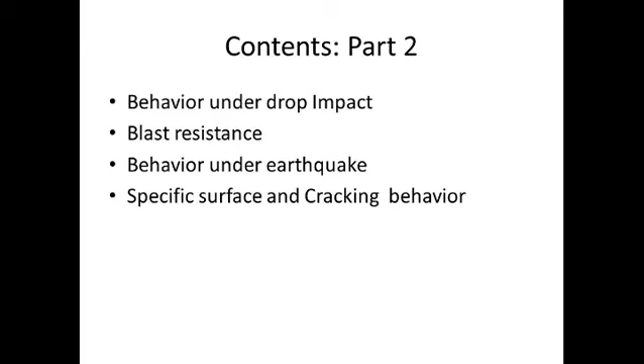I hope my presentation is visible to you. I'm presenting here the work done by my colleagues and my students over the last few years. We initially started with the testing of ferrocement for water tanks and some other components, and thereon we explored different ways of testing it and how we can improve the properties of ferrocement. So this is how the journey of ferrocement was for us as a material which is to be established.

The entire efforts were towards attaining better properties of ferrocement and altering the methods of testing. In my presentation, you will find the conventional testing we had done in the earlier phase, and later on as we changed our testing methods, those methods I would like to present here too. As we explored the ways of testing it, we felt confident that ferrocement shows better properties if we treat that material with a different treatment. So this is how we found out.

It's almost a group of ferrocement researchers who are working on this. To name a few: Dr. Darshan Gaidankar, Dr. Amrut Joshi, Dr. Purandare, Dr. Pimplikar, Professor Minde, and Suman Shinde. They constitute the ferrocement group researching on this material and its various aspects.

Because of the paucity of time, I am splitting this presentation into two parts. Today, I am speaking only about the fundamental properties of ferrocement, where we are not exactly treating ferrocement as RCC.

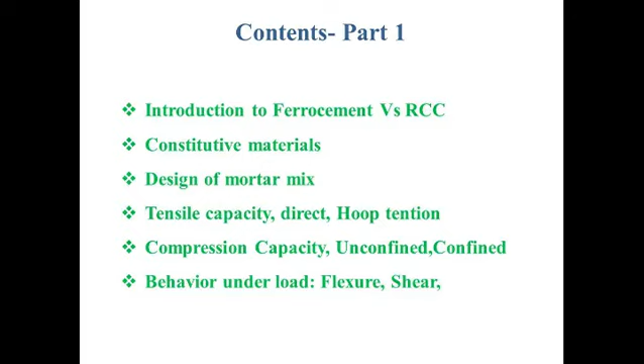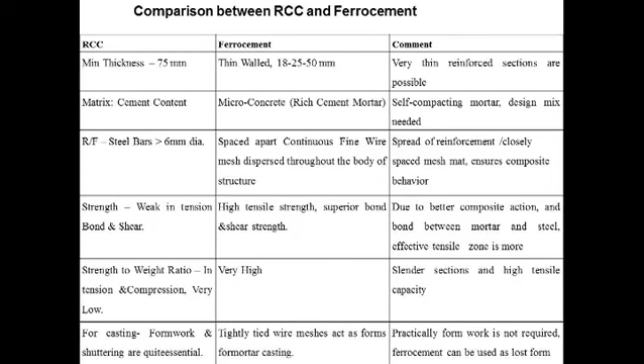We are looking at what are the requirements for constitutive materials, design of mortar mix, tensile capacity in direct tension as well as hoop tension, compression capacity in confined and unconfined concrete, and behavior under load for flexure, shear, etc. Here I am stopping up to shear because bond, etc. I will cover in the second part because of the paucity of time.

So the motivation was: when we thought about ferrocement, what are the permissible stresses that we should consider when we take up any design problem? We were not able to get any correct solution or comment from ACI or any other books, say Naaman's book or Balaguru sir's book. So we tried to find it out by way of experimentation and simulation, what can be the permissible stresses, what can be the ultimate stresses at different loading patterns for ferrocement. This was actually the motivation, and we tried to utilize ferrocement as a structural unit, understanding its various load carrying capacities for different loading conditions, and in what way we can utilize these material properties of ferrocement.

That was the motivation. In the very beginning, we felt that it is definitely behaving in a different way than RCC, because by definition itself, ferrocement is a thin-walled member, maybe 18 to 50 maximum, that is the thickness. And it has to be made using rich cement mortar. So that mortar and its mix design is also a very important part, which plays an important role in imparting the material properties to the ferrocement.

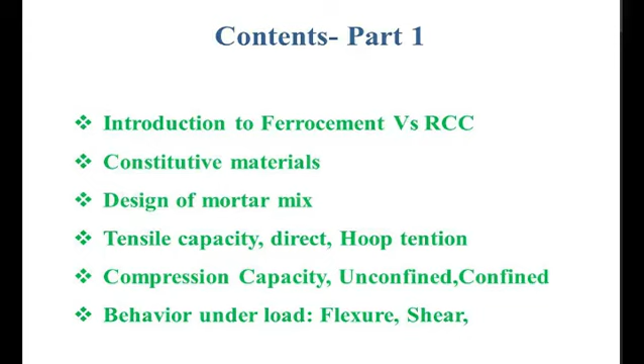So that part is again still there, which needs to be explored if we use high strength reinforcement wires, weld meshes. That will definitely improve the entire property of ferrocement. This is what we felt, that's why it's behaving in a different way than RCC.

Once we establish the properties for the ferrocement, why can't we use it as a structural element? That was the question, and we started chasing this philosophy of using ferrocement because it was exhibiting very good strength in tension as well as flexure, and also in blast and impact. So that's why we are underutilizing the strength of ferrocement.

That was the question, and we tried to establish the material properties so that at least we can comment on the strength of ferrocement for various loading conditions, and then know whether we can use it as structural members. So that was the question.

Hollow columns also we can construct out of ferrocement. And just like we arrange a jigsaw puzzle, we can use these components at the site and erect the structure within some limits of vertical dimension.

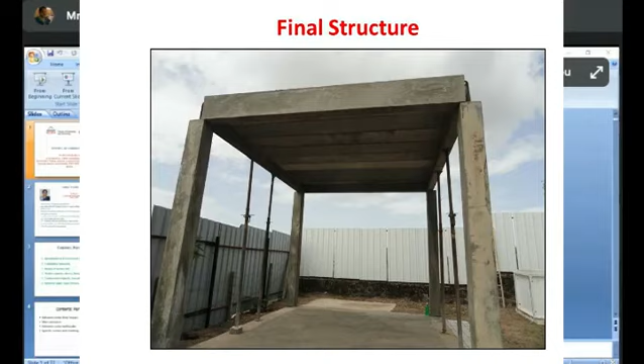This is just a typical example where we can use structural components made out of ferrocement, and we can erect the structure. There is a limitation because the ACI does not accept the design values or the ultimate tensile values, ultimate stresses. So that was the motivation, and we tried to use this cement's capacities for ferrocement being used as a structural component.

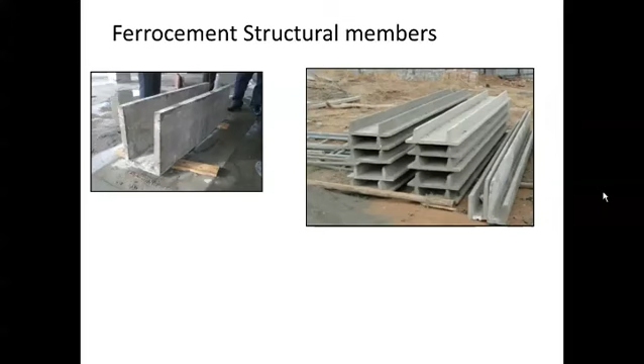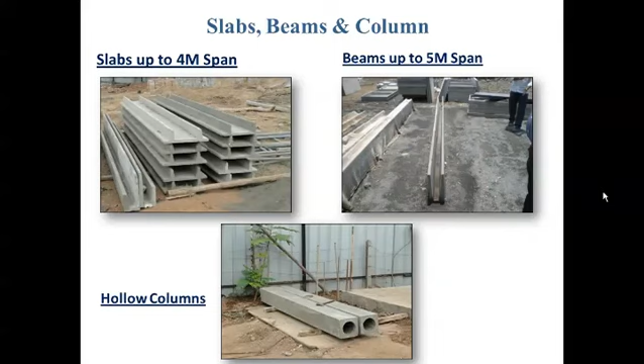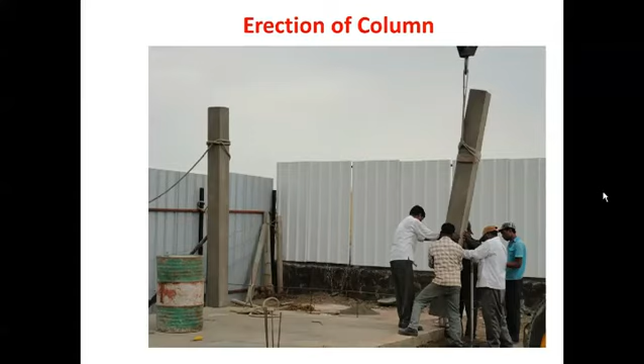The intention started because of this small structure which is seen in the photographs. Here you will see that we are erecting these members, columns, beams, slabs, all made up of ferrocement. These columns are hollow columns, and we can really erect the structure with a small hydra. So there is no much heavy type of equipment required for carrying out the installation of these projects. That was also one of the advantages.

Almost in a few days, you can complete all types of structures like this using ferrocement components. So that became a motivation. But what was required for arriving at this stage was, what are the capacities of ferrocement as a structural member? So that was the point we chased.

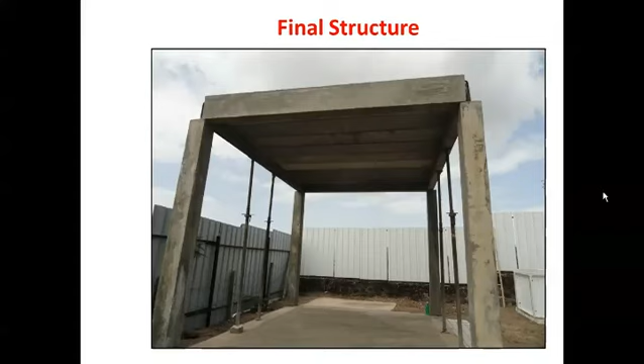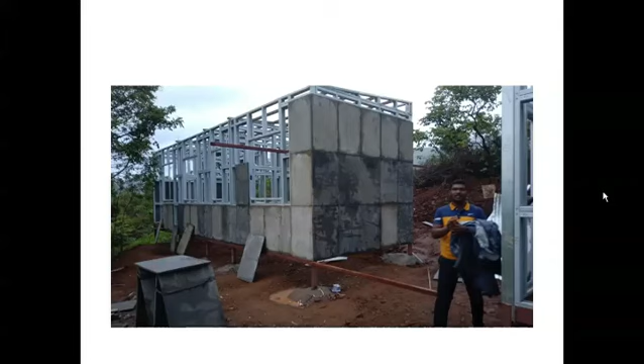You will see here in two ways: complete ferrocement structure and LGS plus ferrocement panel units. This is another type of structure where the loading pattern will be different. So both are possible using ferrocement.

Basically, we will start with the constituent materials, and since we all know that mix design of the mortar will have a major impact on the strength of the ferrocement, mix design was important.

River sand is almost not allowed to be used, that's why we tried with crushed sand. And to reduce the portion of cement, we have also used fly ash, so that we achieve overall economy while actually using the ferrocement materials.

So it was advised to carry out the mix design of the mortar, which will require the workability suitable as self-compacting mortar. That's how workability needs to be maintained. All the efforts which give us that kind of self-compacting workability were required so that we can completely fill the mold with no voids and get a good finish for the mold.

If high strength mortar is used, it was possible to raise the tensile load carrying capacity of the ferrocement in axial tension as well as in flexure, because the compressive strength of mortar itself is higher. Along with that, if we can combine the steel also as a high strength steel, then together that composite can also increase the capacity of ferrocement. So high strength mortar and high strength steel.

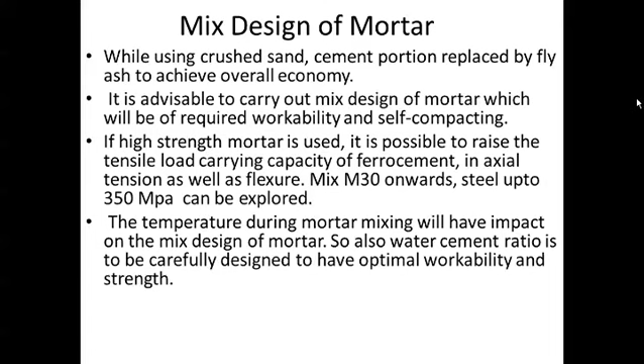Water cement ratio that was optimal for the free flowing, self compacting type of concrete or mortar came to be 0.38 to 0.45. Along with that, you can also combine various chemicals required for improving the workability, depending upon the impact of that chemical. So that also needs to be taken into consideration while doing the mixed design.

And when the cement was replaced by some portion of fly ash, it indicates that up to 35% of cement can be replaced by fly ash without affecting the compressive strength. So that much of economy can be achieved if we replace some portion of cement by fly ash.

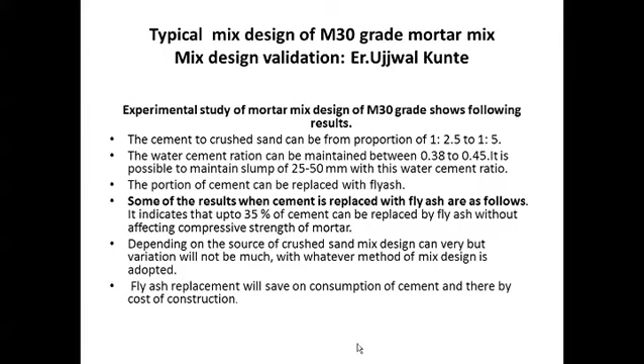Also, we were able to control the temperature at the time of mixing. Depending upon the source of the crushed sand, mix design can vary, and every time you are mixing the mortar, the mix design has to be different because the sources of the constituent materials will have that impact. So fly ash replacement will save the consumption of cement and thereby have a good impact on the overall cost of construction. So that was the impact about the water cement ratio, fly ash replacement, and workability in totality.

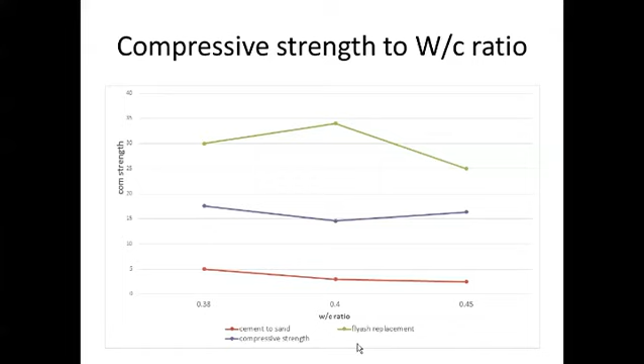So this was the graphical representation. You will see that water cement ratio 0.38 to 0.45, somewhere in between that range, you can always position the water cement ratio so as to have maximum properties for the ferrocement. Next slide please.

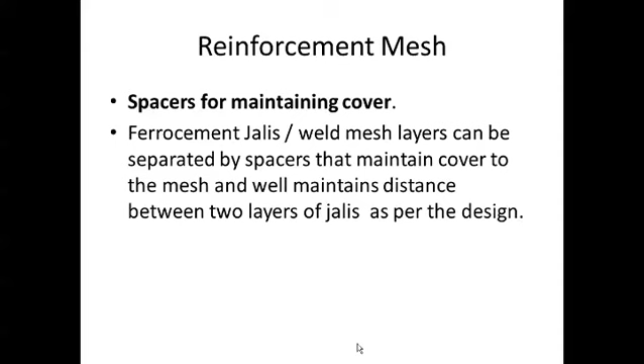Now when we actually cast the ferrocement, mesh comes the next constituent material. When we are keeping one mesh over the other, they have to be separated by spacers so that our cover for those meshes is maintained, as well as the distance between the two consecutive meshes. So specific spacers are to be designed and fixed between the two layers of the jali. So the special spacers were designed and used to maintain the dimensional accuracy of the jali.

Now, when we compare ferrocement as a casting and ferrocement as a hand plastered component, meaning when it is used as hand plastering or mortaring, the two different entities are: if ferrocement is to be designed as a structural element, then physical as well as material qualities have to be consistent and reliable in that entire cast element.

So somewhere there has to be a need of standardization. Now, what is that need of standardization? All the time we must get whatever desired strength is there. So that's why at every level, from constituent to mixing to the casting, there should be a standardized process that will ensure our design parameters for that ferrocement component.

So the first requirement was total encapsulation of the steel meshes as well as full consolidation of the thin section of the member, so that jali and mortar completely behave as a composite material without having any voids or separation of jali and mortar. So total encapsulation must be ensured, and that can be possible only by strict quality control of the casting.

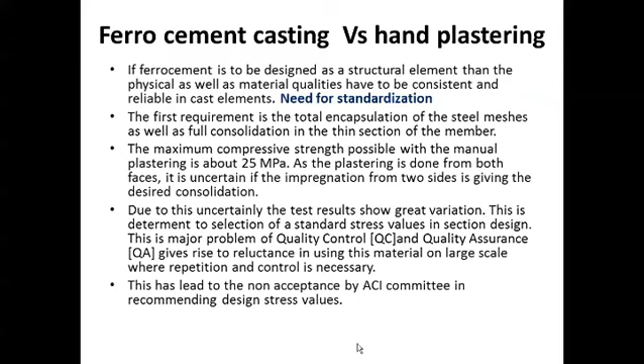Now, when we started with ferrocement casting with strict quality control, execution of high quality casting of the ferrocement, it is necessary to observe several material and construction parameters.

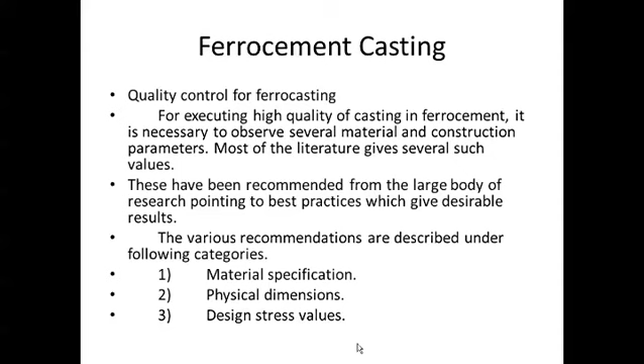Many of the literatures give all these values. Many authors have already done that work and given their comments. These have been recommended from a large body of research pointing out the best practices all over the world. But still, various recommendations are prescribed under the following categories: material specification and its standardization, physical dimensioning and its standardization, design values, and accuracy of those design values, because we have standardized practice for material specification and physical dimensioning. So this was the need of the hour, and that's what we tried to do in our experimentation.

So in the material specification, as I already said, it was a mortar mix. Sand has to be of a grading which does not have too many fines in its particle size proportion. The best results we obtained were from grade 2 distribution of the fines, which gave us better proportioning for the mortar mix.

Large portion of particle fines need more water to obtain the required viscosity, so this has to be borne in mind while using a large portion of fines. Sieve analysis has to be monitored, and its impact must be considered while doing the mix of the mortar.

In order to get M35 as the final compressive strength, because minimum we start with M30, M35 for ferrocement, the preferred proportion of cement to sand ratio is somewhere between 1:2.75 to 1:3. This proportioning, with sand of grade 2, gives a good surface finish.

To get the right viscosity, 0.35 to 0.45 water to cement ratio is used, and a more fluid mix can be made with suitable use of additives, many of which are available in the market with different properties. Some enhance properties, some are retarders, but sometimes they can give additional strength characteristics useful for early demolding of the ferrocement mold. So instructions regarding the use of such chemicals should be properly followed, as we felt whenever we used these chemicals for casting ferrocement components.

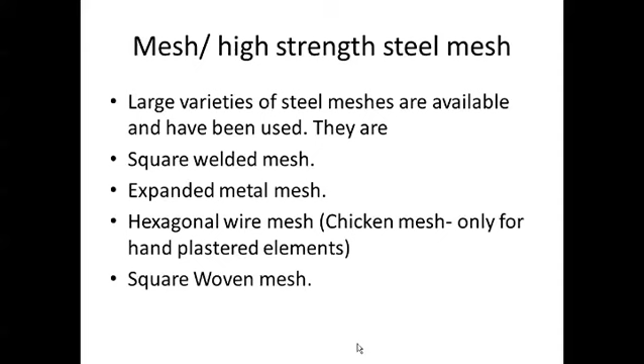Suitability of square welded mesh versus expanded metal mesh: I think all of you have been working on this for pretty long years, and you know which mesh is suitable for what kind of ferrocement structure. For a precast structural element of ferrocement, weld mesh is very useful, while expanded metal mesh is not really suitable and not recommended, because it will not contribute to the load transfer mechanism as the load is being applied.

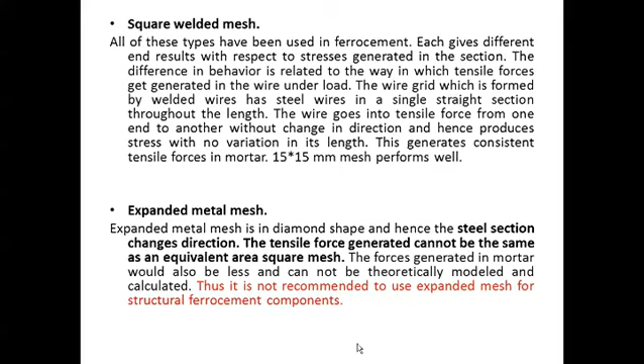Hexagonal wire mesh or chicken mesh: in the case of woven mesh, it is even worse, because the wire diameter is about 0.5 millimeter, and when tension is applied to the wire, it has a tendency to open up at every location where the woven cross wires intersect with each other. So this is how it will not really contribute to taking the tension, which is why chicken mesh can only be useful for arresting the crack mechanism.

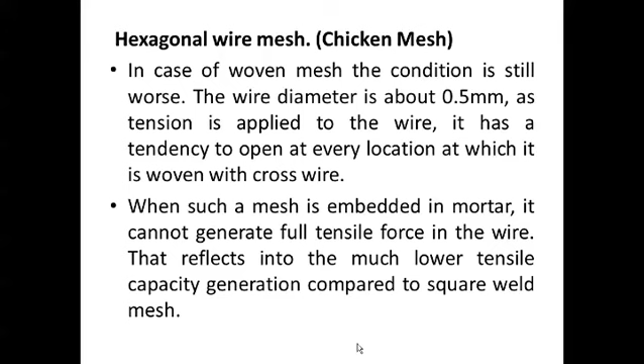So only for that purpose chicken mesh can be used. When such mesh is embedded in the mortar, it cannot generate full tensile force in the wire. In other words, we can say chicken mesh will not contribute to the tensile strength of the ferrocement. This reflects into lesser tensile strength capacity generation as compared to square weld mesh, while in square weld mesh, all the wires in one direction will contribute to the tension capacity in that direction for the ferrocement component.

Now, the thickness of the cast sections being very small, two or more mesh layers are placed. Due to the structural requirements, it is necessary to keep them in correct position in cross section. In order to achieve this positional accuracy, it is necessary to have cages of skeletal steel of suitable diameter. It also helps in ensuring the mortar impregnation of the entire wire mesh without leaving any void.

The cross-sectional area of the skeletal steel enhances the shear capacity as well, because of the close spacing and the interaction between the two consecutive jalis or meshes which are placed together.

So percentage of steel in the cross section, designated in terms of volume fraction, plays not much role in generation of tensile strength in the mortar, that was observed during the experimentation. Though ACI code recommends 1.8 to 2% of the reinforcement to be used, it is observed that minimum volume fraction should not be less than 1.5% to obtain good results.

So in case of areas where the compressive stresses are predominant, the percentage can be even lesser than 1.5, because anyway steel will not be, mortar will be contributing into the compression resistance. So only if the component is resisting compression, there we can reduce the volume fraction of this reinforcement to less than 1.5%.

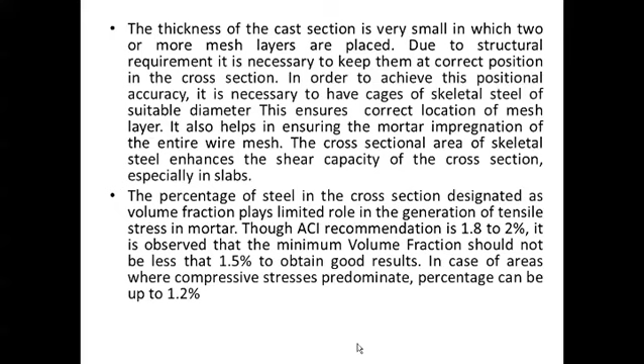Next, please. Now here we started thinking about the philosophy, what exactly happens when we are sandwiching the jali between the mortar, which is of high strength. So when the wire is encompassed with the high strength mortar in one direction or in two directions as shown in this figure...

Our philosophy is that the area which is very adjacent to the reinforcement actually participates into the tension carrying capacity. And how much is that area that contributes into tension carrying capacity? It is almost equal to 5 millimeters for a jali diameter of 1.4 mm diameter.

So we call this entire circular zone, which is surrounding the reinforcement, the zone of influence or radius of influence, because that zone is participating in imparting the tensile capacity to the component.

So based on this philosophy, we worked out the further testing, and also we simulated it using the finite element analysis, and there also we can verify and validate that yes, there is some zone which is adjacent to the jali which contributes into the tensile load carrying capacity.

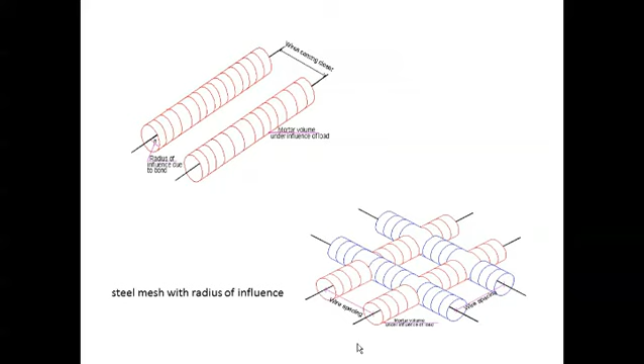Though we say that mortar takes compression and steel takes tension, some part of mortar is also useful in taking the tensile force. Now, because this jali is very closely spaced, 15 mm by 15 mm or 20 mm by 20 mm, we can really bring this zone of influence together with each other, so that the entire plate, entire plank, can be very solid and contribute completely into the tension.

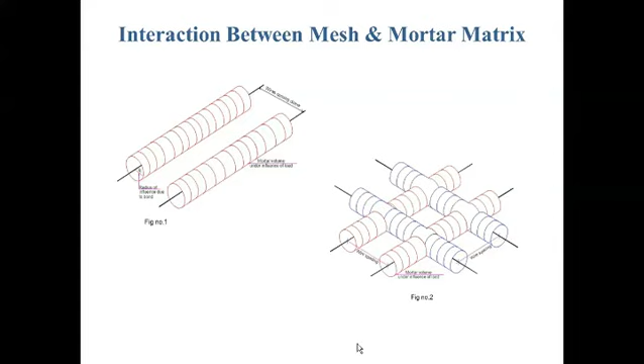So that was the entire philosophy. 5 millimeters from this side, 5 millimeters from the other side, so that becomes 10 millimeters. If we bring the center to center distance of jali together, it will be more strong. This is what we observed during our experimentation.

Next, please. The way we stack these jalis, either we can stagger it or we can keep it exactly one over the other. So what happens when we keep it exactly over the other?

So based upon our philosophy that there is a radius of influence, when we keep one jali exactly over the other, there will be some voids here which will not really be contributing into that tension carrying capacity or compression carrying capacity.

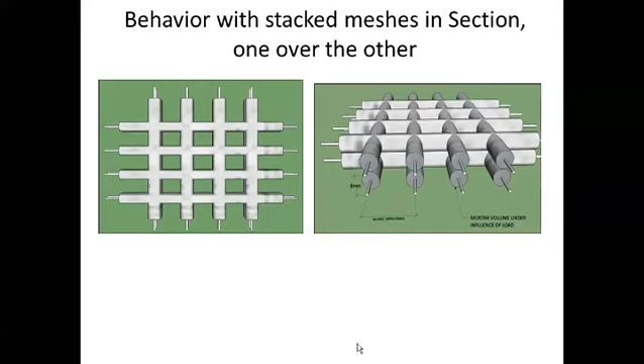So what we can do is stagger it, and in that case, if we stagger the jalis, we can overlap these influence areas, so that entirely we can bring the cross section into the load carrying zone. That will be depicted in the next slide.

So here you will see, if you stagger the jalis, you can stagger this zone of influence also. This becomes a close knit area, cross section, where the entire composite of steel and mortar will be useful in taking that load. Whether this philosophy works or not, this is what we tried in our testing, and what we got, we will see in the next thing.

The next part again is physical dimensioning. Earlier, we covered the constituent materials, their quality, and how we should maintain the quality for the constituent materials we have seen. Now let's move to physical dimensioning.

One of the first issues is the diameter of wire in the mesh. ACI code recommends almost 0.5 millimeter to 1.5 millimeter diameter. It is not possible to handle and place wire with diameter less than 1 millimeter. The mesh tends not to hold its shape and is very difficult to keep in correct position. It also bulges during concreting because it is very light in weight.

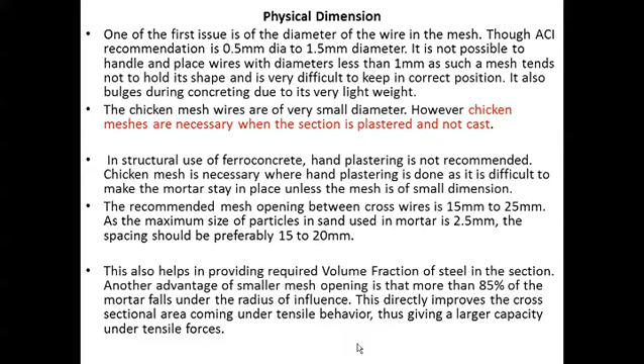This was observed in the experiments that we conducted, which were typical experiments performed through tensile test and flexural test.

Experiments have been done placing the meshes staggered, so the cover is left out of the area of tensile influence. This increases the participation of the entire section into the load carrying mechanism. This is how we can place or stagger the meshes depending on the desired composition of the section, while maintaining the volume fraction of reinforcement to be provided. These things can be designed, the working can be done, and then only the casting can proceed.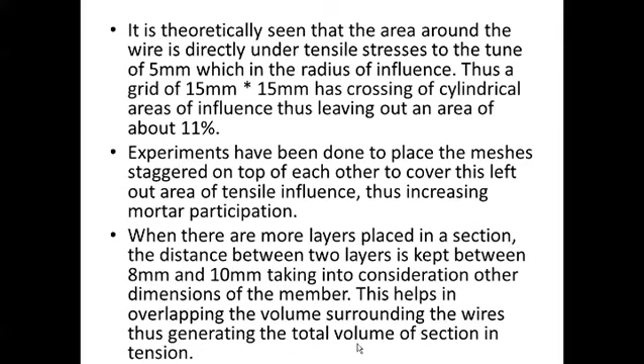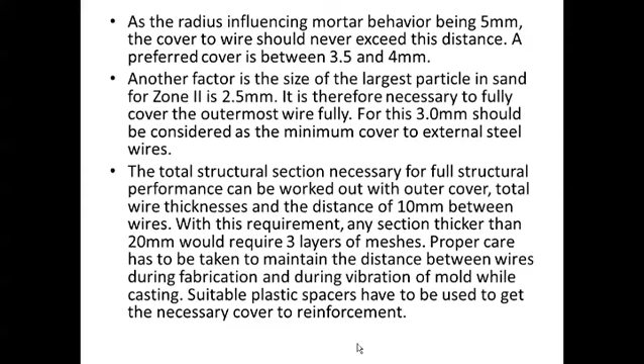Next, please. I will skip this because these layers I will show on the diagrams itself. Let's go to the next one.

Design stress value was the third parameter. As mentioned before, ACI does not recommend any stress values in tension, bending or shear. Due to quality control issues of handmade products, some authors recommend only casting of elements to get quality control and predictable stress values in cast elements. The major departure from the construction method adopted since the inception of ferrocement, almost 50 years back, it has to be appreciated that no structure can now be designed without predictable product quality and its allowable stress values.

Experimental work to determine tension values was done traditionally with mortar prisms with steel wires tested in axial tension. The value was taken as the possible tensile stress in the ferrocement, and a factor of safety of up to 3, 4, or 5 was considered in the design process.

From experiments carried out by various authors, a similar value was observed for axial tension, about 14 MPa, using steel with 250 MPa yield stress, giving a ferrocement stress value of 14 MPa. But the same steel generated almost 24 MPa tensile stress at first crack in hoop tension or in bending. So we can raise the bar from 14 MPa to 24 MPa by adopting methods to control various processes. This increase from 14 to 24, or say 25, is a pretty good improvement in the property.

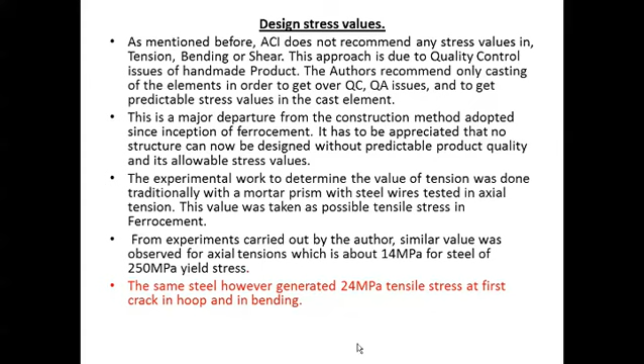What the authors suggest, say Antoine Naaman, is that the tensile stress is almost half the stress observed in bending condition. This works out to a value for axial tension of about 12 MPa, because we are considering ultimate tensile strength as 24 MPa as given by Antoine Naaman. So the tensile stress to be taken for design purposes is half of it.

Shear stress, what he suggests, is 1/3 of the stress obtained in bending. So that works out to be just 8 MPa. These are the values offered and available in the text from various sources, conducted by Balaguru, Shah, as well as Antoine Naaman. They would be a safe average for tests by many other researchers who have given it.

It is also reported that higher values of bending tension can be observed, reaching up to almost 30 to 35 MPa, when we use high tensile steel wires and mortar of 30 MPa plus capacity. So we are reaching from the elementary values available in the books, from 24 to 35.

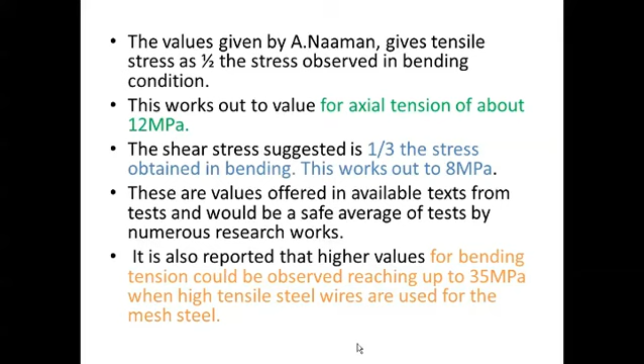What exactly happens when we test it for various loading conditions, say if it is in pure tension? Earlier, in our first phase, we tested some tension samples with dumbbell shaped specimens, but then we changed our pattern. So what exactly happens? We tried to find out the philosophy behind it. If this is the jali which is embedded into the matrix and direct tensile force is applied, only the steel which is in the direction of loading plays a role in taking the tensile load. The jali or reinforcement in the transverse direction does not contribute to this tensile capacity for the ferrocement.

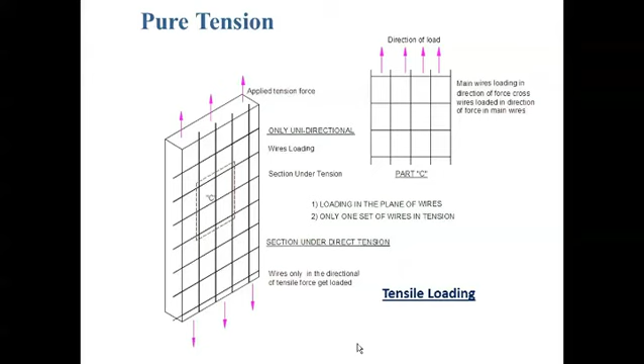The typical load elongation curve given by ferrocement, we all know, exhibits strength up to 25. But experimentally we can go even beyond that. This is what is emphasized here. After conducting many experiments, 25 will be, we can say, the minimum value of strength which we can observe. We can still go ahead of 25 Newton per mm square.

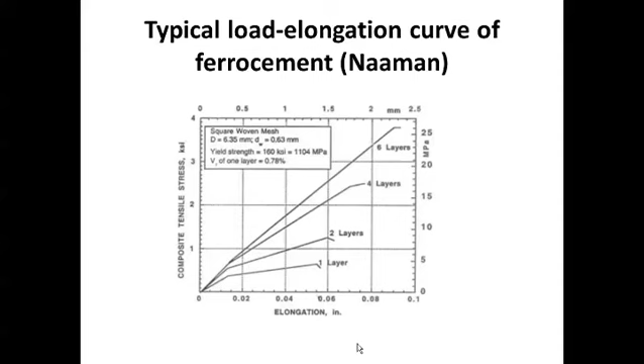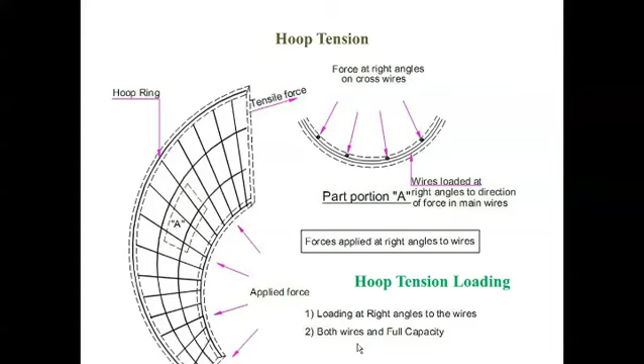Now, direct tension was only one way of testing tension. There is also hoop tension, because ferrocement is many times used for water tanks also. So in what way can we say that by virtue of the shape of the curvature, it imparts that strength? This is also seen in curved forms of ferrocement, and we can test it in hoop tension as well. When we test in hoop tension, all the jali, transverse as well as longitudinal, come into picture and exhibit tension, with the tensile zone equally distributed in both directions of the jali. So this is a more useful way of loading and utilizing the capacity of ferrocement to its fullest extent.

We could see that behavior in hoop tension. What we did was cast PCC cylinders which were encased with a ferrocement jacket, and then tested them for hoop tension. Compression was applied to the cylinder, and we found that the capacity of the PCC cast in the form of a cylinder was enhanced multi-fold, because it was confined compression for the concrete. The force generated in the ferrocement was hoop tension, and we got a lot of hoop tensile capacity when tested in hoop tension, more than 24 Newton per mm square. With M30 grade mortar used for the jacketing, it reached almost up to 32 Newton per mm square when tested in hoop tension.

So there is a question here for me as an academician. Just like we use the limit state method and utilize some portion of steel in the non-linear zone also, when we load ferrocement in its hoop tension way, maybe we will be able to load it in its non-linear zone as well and get that enhanced strength of the ferrocement. So that is possible if we load it in hoop tension.

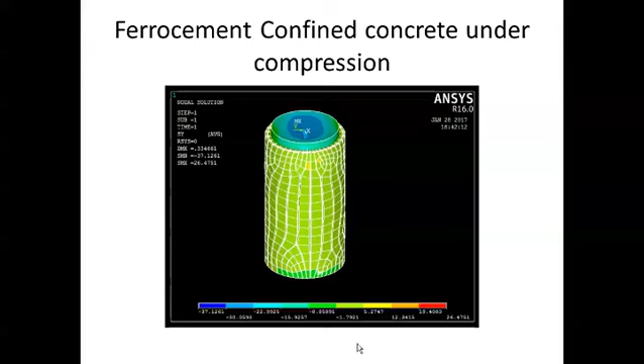And this is optimal utilization of the capacity of the ferrocement.

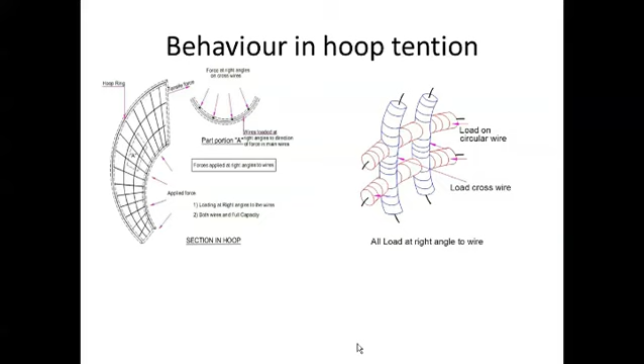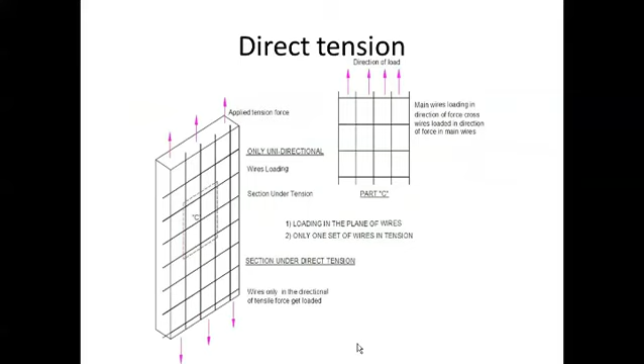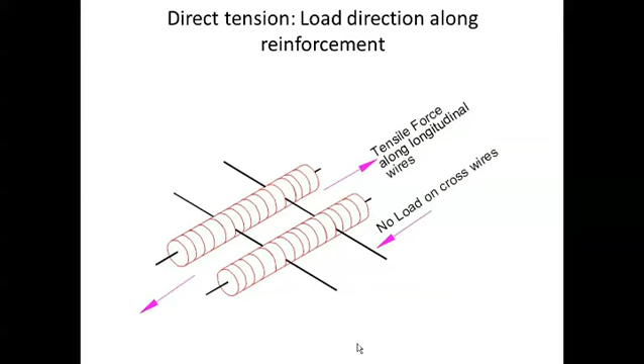So when we load it in direct tension, only these two zones are participating in the tension, while when we load it in hoop tension, we get the entire surface of the ferrocement participating in hoop tension.

Now, how to test it instead of a dumbbell shaped specimen? How to test the plate in tension? So we made two slabs like this, pasted them, and arranged the setup as shown in this figure. We bolted it with two steel plates and gripped it into the two crossheads of the universal testing machine. These two plates were glued together, with one plate having a higher thickness than the other, so that the plate with the smaller thickness would undergo complete tension. This is how we tested this plate for direct tension.

We found that after 28 days of curing, we got a tensile strength of 16 MPa. There was no failure at the joints or at the crossheads; it was complete tension failure, which was ensured by utilizing this test setup.

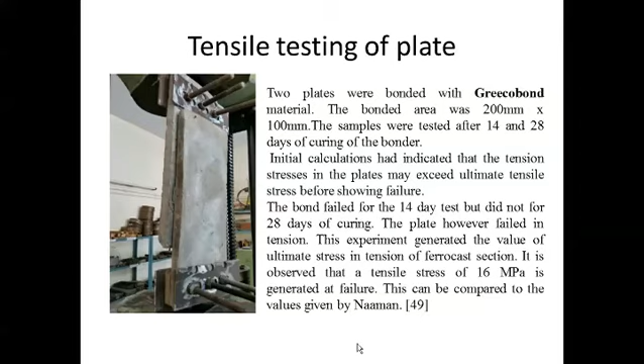This was conforming to the tests done by Naaman, and we could get similar kinds of results when the plate was tested directly.

Now the direct compression test of ferrocement. The challenge was that if we load the specimen in direct compression under the two crossheads, there was a possibility it would get crushed near the crossheads. So we increased the cross section of the specimen at the two crossheads so that it would not fail there, at the bottom or at the top.

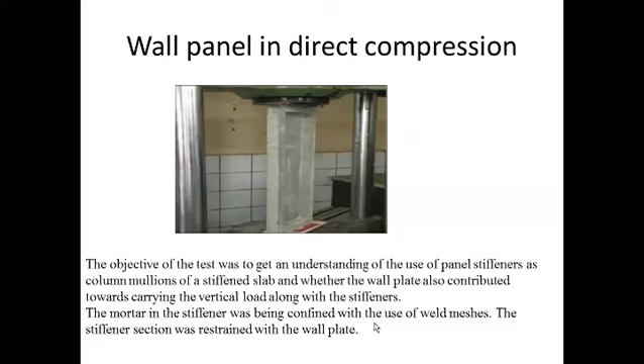A zone of failure was induced in the middle. You can see the thickness of the middle portion is the actual thickness of 20 millimeters of ferrocement, while the edges were made thicker than the central portion, so the zone of failure was introduced in the central portion. This is how direct compression was tested, and we tested the wall panel unit in direct compression, since it may be used as a compression element.

We got the direct compression capacity as almost 367 kilonewtons. Applying theory to the loading condition and end constraints on this column, Euler's load comes out to almost 200 kilonewtons if both ends are hinged, and almost 300 kilonewtons if both ends are fixed. But the actual test load we got was 372 kilonewtons.

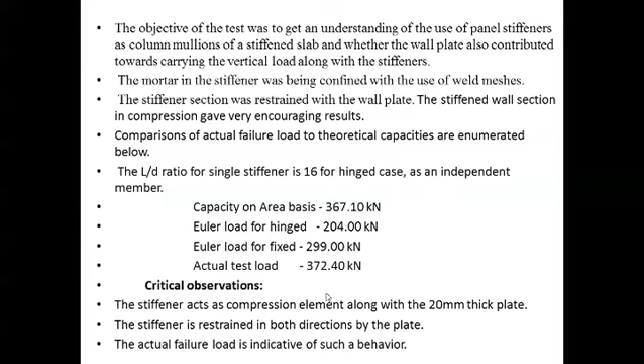What was the observation here? The L by D ratio for a single stiffener is 16 for this particular specimen. For this L by D ratio of 16, with an actual compression testing load of 372 kilonewtons, the observation was that the stiffener acts as a compression element along with the 20 mm thickness plate of the ferrocement. The stiffener is restrained in both directions of the plate, X and Y, both providing restraint against buckling of the panel. So it is not exactly a single column under direct compression, but rather a two-way compression, two-way buckling action. The actual failure load is indicative of this kind of behavior when the plates are used as compression elements. This was the observation when we tested the ferrocement plates under compression.

In case of bending, we tested the units under 4-point loading or 2-point loading, pure bending we can say. When we tested the 2-point loading slabs, various thicknesses and various percentages of steel provided by number of jalis were tested.

We have ensured that, just like a beam, there is a neutral axis, with a compression zone above it and a tension zone below it. We placed the reinforcement jali, one in the compression zone and one in the tension zone, with no jali at the neutral axis.

This is how the specimens were cast, and we tested them in bending. This was the test setup, and you can see the flexural cracks originating from the tension zone. The setup is for pure bending, without introducing a shear zone.

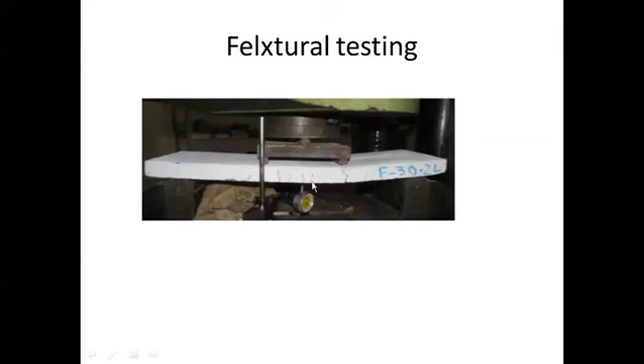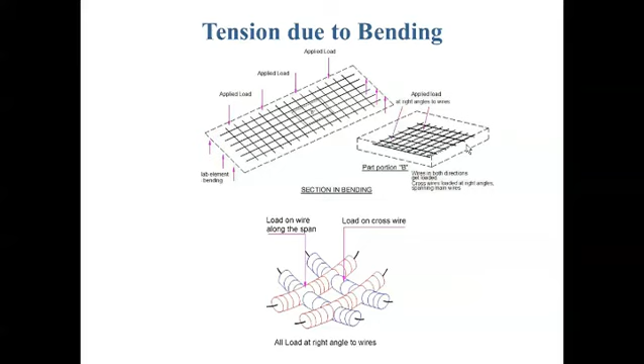When we subject it to flexure, it behaves almost like a two-way slab, with reinforcement contributing to the flexure in both directions in the plane of the ferrocement plate.

That can also be simulated, and we can get actual stresses within the jali as well as in the surrounding mortar, in both tension and compression zones. We could test it and get values for the stresses and deformations in the mortar.

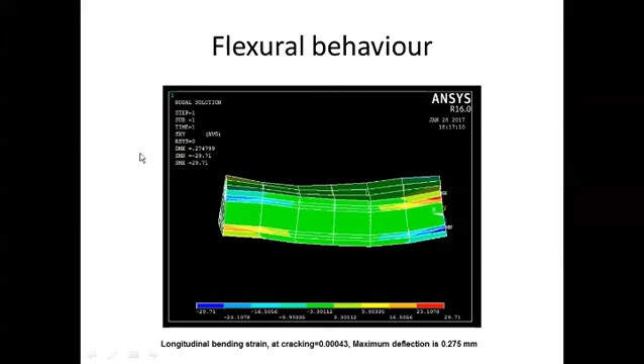If you can read the value here, the mortar strength was 29 Newton per mm square. So the analytical and experimental values match pretty well together, supporting our comment that we can enhance the properties of ferrocement through analytical study as well.

This shows the deflection pattern and zone, and what happens exactly at the jali. The stresses induced are depicted by different color codings, each representing a specific stress value at that point. We observed the stress at first crack was almost 28 Newton per mm square in the mortar.

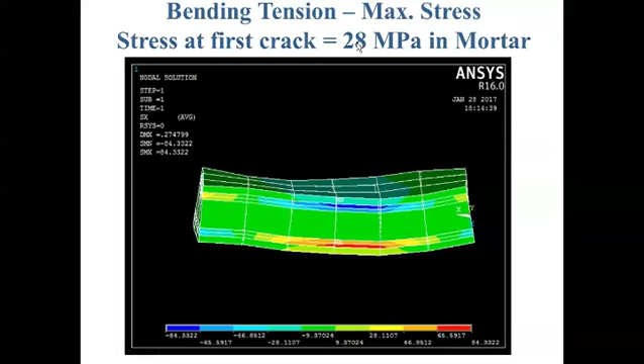As we increase the loading, the crack propagates towards the neutral axis, and we could obtain an ultimate value of load carrying capacity as well.

After testing the slabs, we also tested the actual members used as flexural members. One flexural member cast was a full-scale beam with this channel cross section, 3 meters long.

The complete 3-meter full-scale beam was tested under 4-point loading, and we could reach a flexural tensile strength of almost 25 Newton per mm square in actual full-scale testing of the beam.

This is the assured value of flexural stress. We plotted load versus deflection for this beam and saw elastic behavior up to a certain limit, then toughness beyond that, indicating a non-linear zone. Still, we reached an ultimate flexural tensile strength of 29 Newton per mm square for this beam.

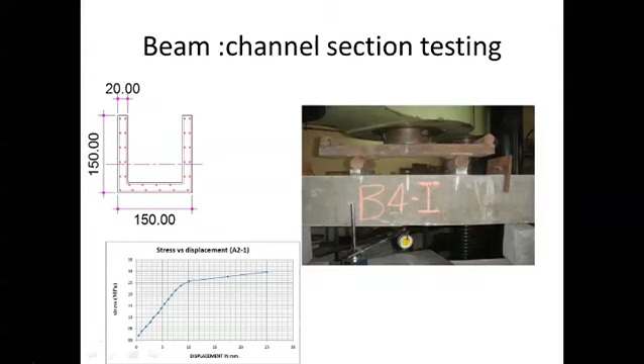This is a typical setup for ferrocement with 3 jalis. This test had one more jali at the neutral axis. We observed that results for 2 jalis without any jali at the neutral axis behaved exactly the same as the sample with a jali at the neutral axis.

This indicates that if reinforcement is placed at the midsection, it does not really contribute to flexural strength. So reinforcement must be away from the neutral axis. This is our remark from testing two different kinds of specimens, with jali not at the neutral axis and jali at the neutral axis.

You will see there is consistent deflection when we test it in flexure, and how to incorporate this deflection for serviceability still remains to be explored. Only then will we be able to comment on the serviceability criteria, which is a function of the deflection of the ferrocement component.

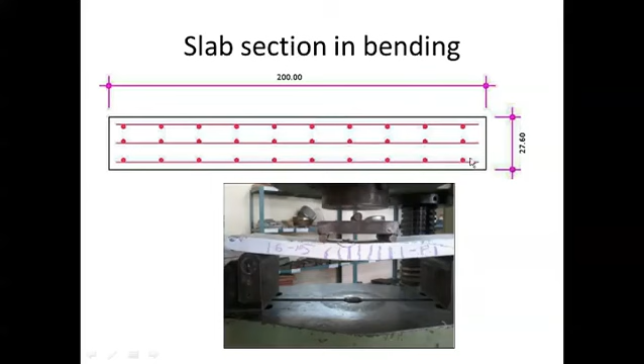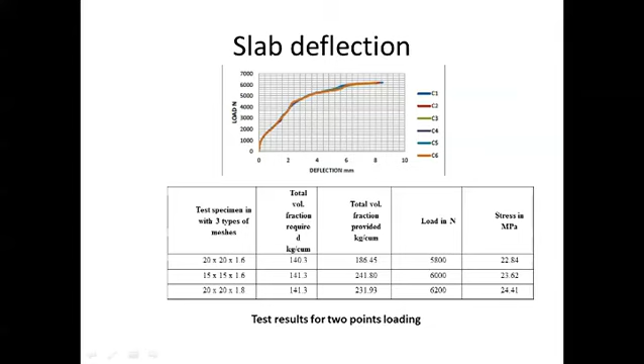In the earlier slide, you saw different sizes of jalis used: 20 by 20, 15 by 15, and 20 by 20 with 1.8 mm diameter. You can see the stress values here. When the steel wire diameter was 1.8 mm, it gave almost 24 MPa compared to when we reduced the diameter to 1.6. So the diameter of steel does play some role, but 1.8 definitely gives better results than 1.6 diameter jali reinforcement.

Just out of curiosity, we did some analysis and actual testing. We cast one plate and tested it with a loading of 500 kg, as if a car was standing on this plate, and we could simulate it using finite element analysis as well. So what happens to the fiber ferrocement plate if a 500 kg car is kept on this plate?

We simulated it and got the load distribution pattern. Deflection was almost 3 millimeters at the center midspan, and the stresses are also within limits for this plate. The fun part, why we did this, was just a hypothetical experiment to find out whether this entire plate goes into sharing that load of 500 kg or not.

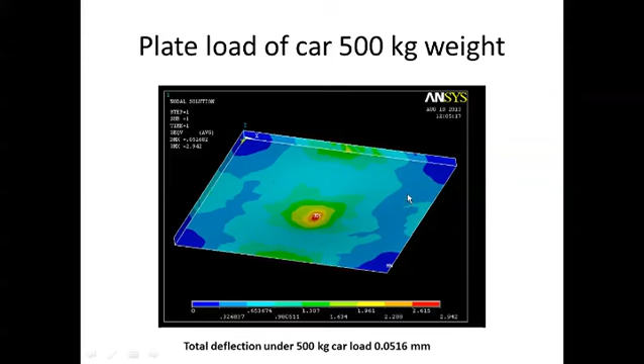So that is depicted by finite element analysis. This is the portion shown in sky blue color, which is actually contributing. The zone is quite big, almost 80% of the plate is contributing to sustaining the applied load. That was the takeaway from this hypothetical study that we had done.

In compression, we also tested confined core compression, on circular and square cross sections with weld mesh confinement. We took a circular column with ferrocement ferrocast tube, a circular column confined with 2 layers of weld mesh without tube and no PCC inside, and a square section with ferrocast tube confinement. Now I will show you what results were obtained.

When circular confinement was done for plain concrete, this is type 1. In different cases we got enhanced strength with 2, 3, and 4 layers of reinforcement used as confinement. The compressive stress we got was almost 40 MPa with 2 layers, 60 MPa with 3 layers, and almost 64 MPa with 4 layers.

As you go on using this confinement, we can derive the advantage of confining the plain concrete with the help of ferrocement. Load carrying capacity was enhanced from almost 30% to 110%, just because of the jacketing. So jacketing is also one of the important uses of ferrocement, which can give really good advantage if utilized properly.

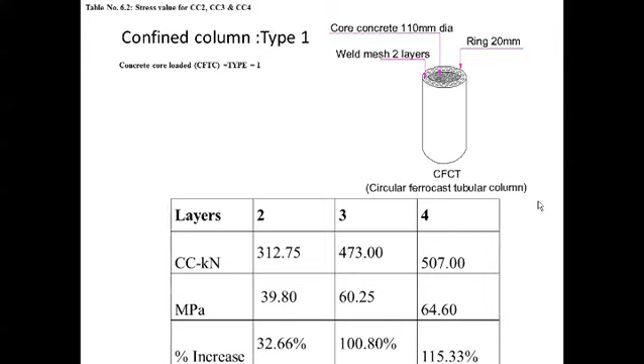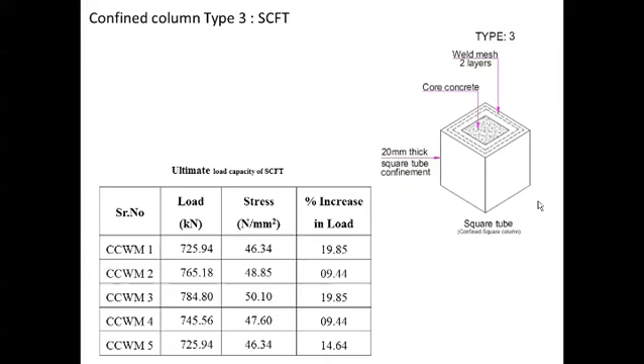Again, we come back to the previous philosophy: because of hoop tension, the steel going into hoop tension imparts more load carrying capacity. While in square jacketing, it does not really go into hoop tension, which is why it does not increase the load carrying capacity as much. Only hoop tension gives you enhanced load carrying capacity in compression. That was the takeaway from testing under confined compression.

In the behavior of shear, the shear strength of ferrocement is approximately taken as 30 to 35% of its tensile capacity. For equivalent bending strength, regardless of the type and content of the mesh, mortar strength is the parameter that influences the shear strength, as given by various authors.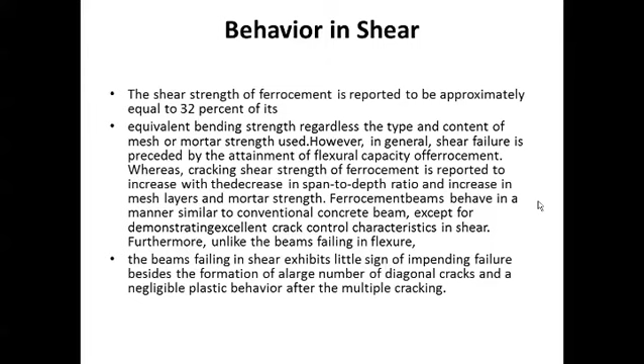Beams failing in shear will exhibit little sign of impending failure besides the formation of a large number of diagonal cracks, and negligible plastic behavior after multiple cracking, which are visibly seen on the surface. We did finite element analysis for this as well as physical testing to observe the behavior in shear.

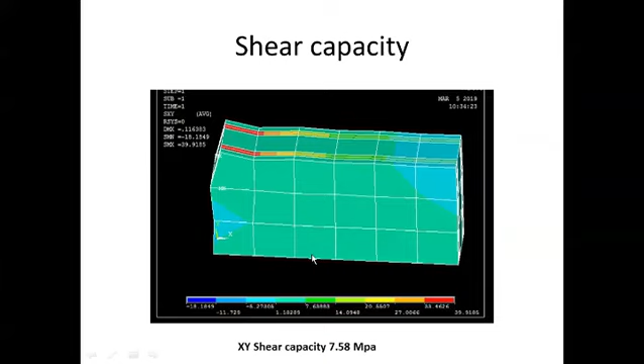This was the sample where lateral load was applied, depicting a pure shear load. This entire zone, shown in green color, goes into pure shear, and the pure shear stress is almost 7.5 Newton per mm square, which confirms the one-third stress value indicated by Antoine Naaman. So we can say the range of shear capacity lies somewhere between one-third to almost 33% of tensile capacity.

Another way of using ferrocement is not as a single component, but combined with light gauge steel structure, which gives it added strength. So what happens if we make a composite out of light gauge steel structure and the ferrocement panel?

If we consider the strength of a single brick wall to be about 12.72 kilonewton for one unit section, the same dimension of LGS with one ferro panel gives almost 35 kilonewton of flexural capacity. With two panels along with the LGS, it enhances to a fold of 140. By creating a sandwich section with two panels into one LGS section, we can enhance its flexural capacity manifold. This is seen when we make a composite out of light gauge steel panel.

Some more research is still going on regarding this combination of composite LGS and ferro panels, including how we separate the two panels of 18 mm thickness, how much gap there is between them, and how that gap affects the flexural load carrying capacity. That research is still ongoing.

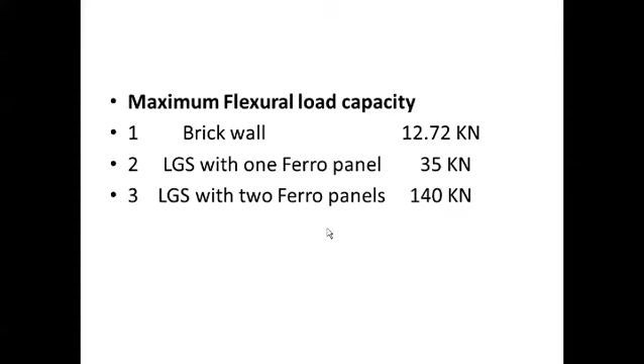I want to present a case study here, because the way ferrocement can be used is the inherent ferrocement component itself, in multiple forms, whether used with LGS sections or as ferrocement structural components.

I am presenting one case study here, of a load bearing ferrocement house, just one room, kitchen and a veranda, a small unit, using ferrocement panel walls and ferrocement slab. The construction time was 5 days.

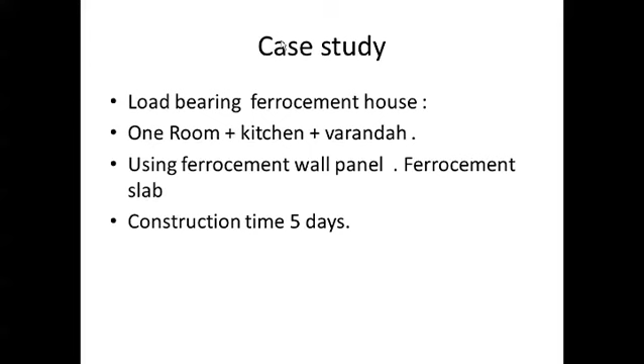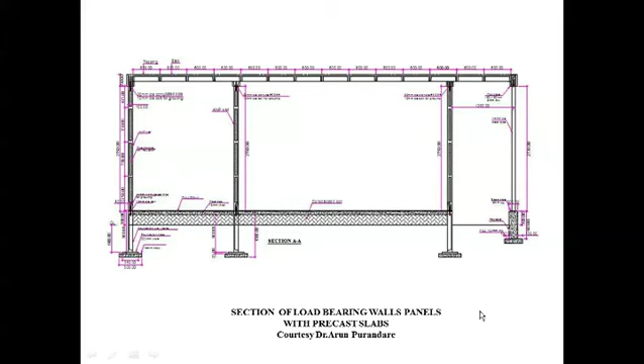This is a typical elevation, showing the kitchen, the hall, and the outer veranda portion, with typical dimensions and a sectional drawing given here. I borrowed this from Purandare sir, because he actually constructed this, and I felt this demonstrates how we can use pure ferrocement components as structural units.

Are these precast panels, ma'am? Yes, all precast. That's what I'm showing.

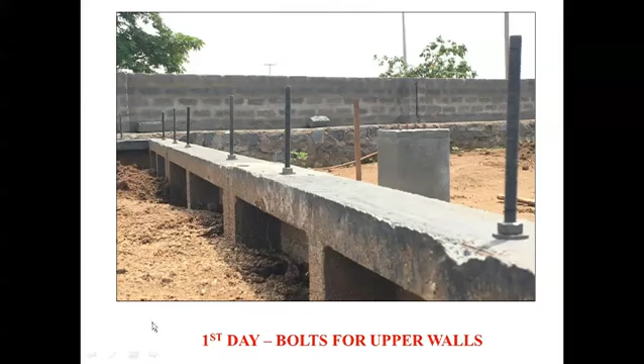You will see that on the first day of construction, the wall up to plinth level was constructed within 6 hours. This is the foundation made ready on the first day, with bolts inserted so that we can erect the wall panels along with these bolts.

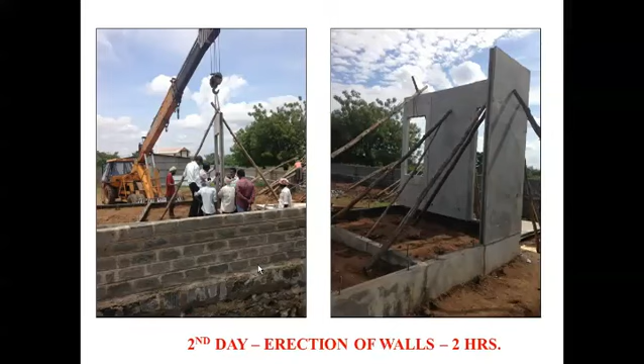Along the plinth which is made, we can simply erect these wall panels using a Hydra crane, and you can use the stakes very easily. Very few laborers are required to erect this.

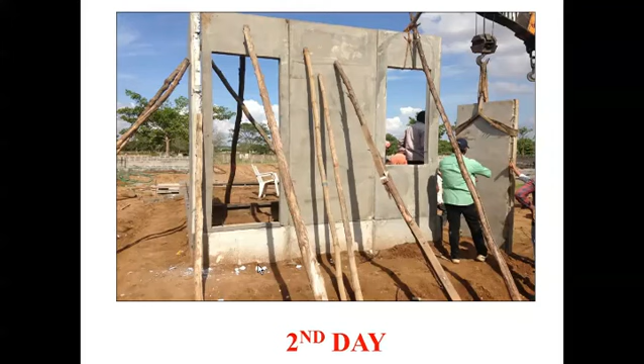When you keep the two wall panels adjacent to each other, there is a sealant which can be used to seal the two adjacent panels.

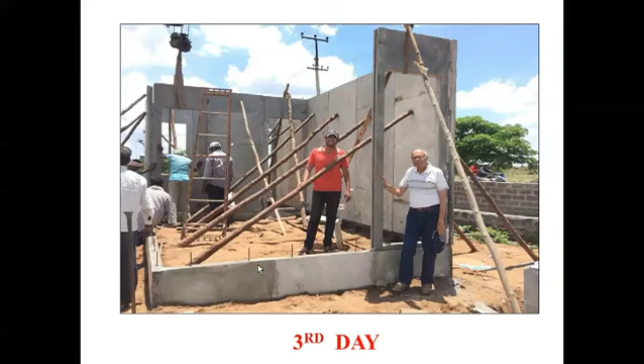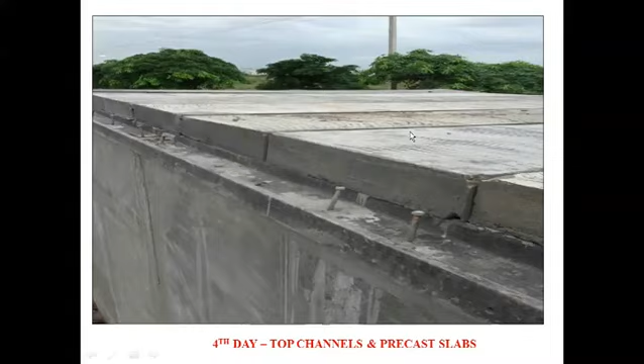On the third day, you can raise the structure up to this much, with all wall sections and opening sections erected. This is the ferro slab - you can see this part is also precast ferrocement slab, like inverted channels used as ferrocement slabs.

On the fourth day, the entire top portion is completed. Structurally we can raise this much of the structure within 4 days just by erecting various precast components, and you can see the finish as well - this is a completely unfinished structure.

For the first time, I am trying to assemble all these things for experts who are not from the academic area, so I'm not entirely sure what exactly will appeal to the audience.

This presentation has certainly increased confidence about the strength, whether it is as per design or not, what the assumptions are, whether it behaves as expected, and about the material behavioral properties. These are important issues to keep in mind while constructing in ferrocement. Thank you very much for the excellent presentation.

I will begin with questions from myself, just 3 points which I will go through quickly. The first point is about the discussions regarding the filling of mortar while doing construction.

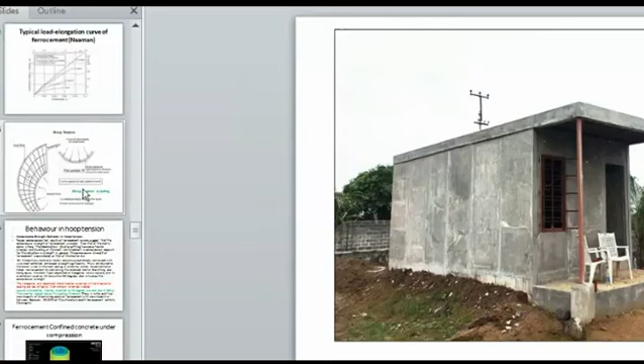I think I should give you a complete table of each component and its dimensions. Yes, please do that. Please do that.

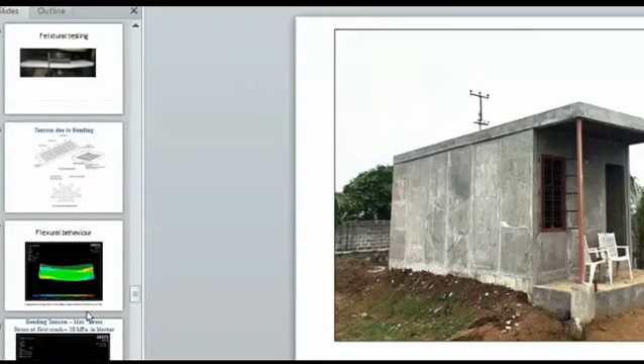Please don't shorten your presentation so that it becomes without any meaning. The subject is not to be cut down or shortened. I'm a teacher, I can go on talking for hours together, but you have to give the complete picture to the student.

But for today, please forgive her, because it is not her fault - it is on the organizers, since we have limited the time. You should not take up a subject which cannot be covered in that time, because you are doing a great injustice to the subject. I'm sorry again, we do agree, sir.

Have you finished your points? Thank you, Dr. Jain, sir. Very studiously, he has shown some points which need some more research or clarification, and that will certainly improve the quality and reliability of the research. So we can take it that way, and we'll certainly share the outcomes of all this.

Now, can I have a few minutes from Mr. Milind? He's a good designer and has worked himself on the properties of cement. Your comments, Milind, please. No, basically, I would not like to rob Dr. Mridula and her team of the work she has done, but the direction is very important, and I am a little confused and surprised.